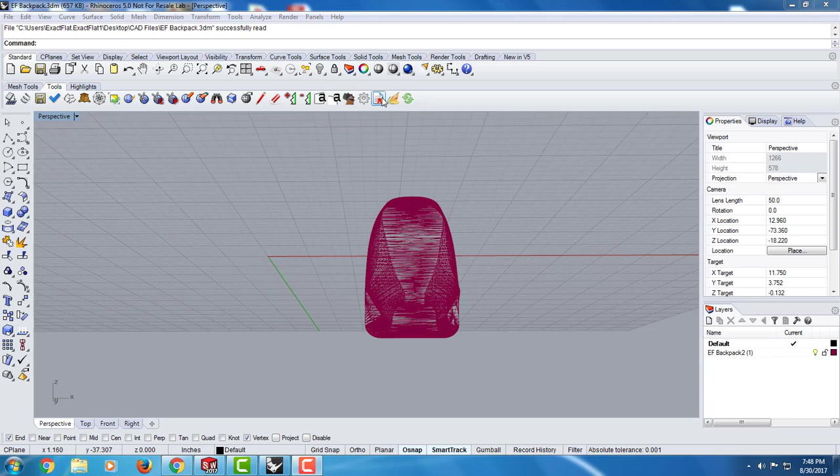This video will show a few of the tools in ExactFlat. In this case I have a backpack or a rucksack that was created, and we'll go through and show some of the tools.

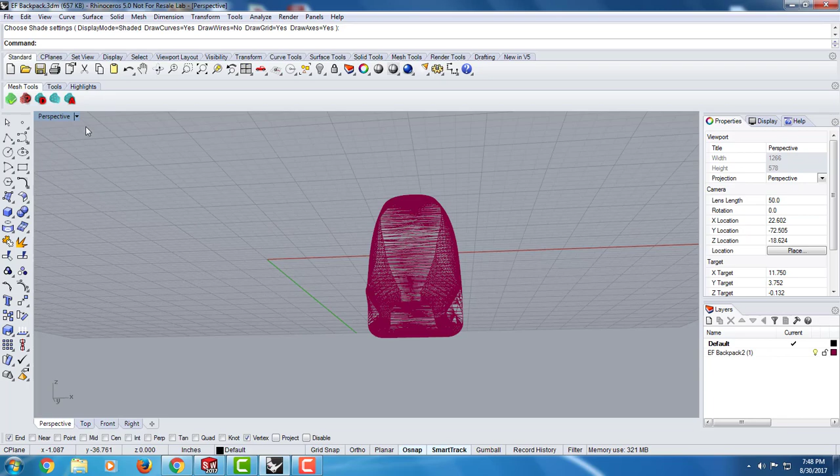The ExactFlat tools go from left to right, and we have meshing tools. If you have a laser scan or a file with odd looking meshing, we can remesh it. I'll show the meshing tool on some of these surfaces. We select adaptive remesh, select the part we want to remesh, and hit enter on our keyboard.

Once we do that, we have our adaptive remesh tools and sew tolerance, which basically explains how many vertices we want on each. Right now this vertex count is almost 5,000 vertices, and there are 5 meshes that make up this bag. That's what these numbers tell us.

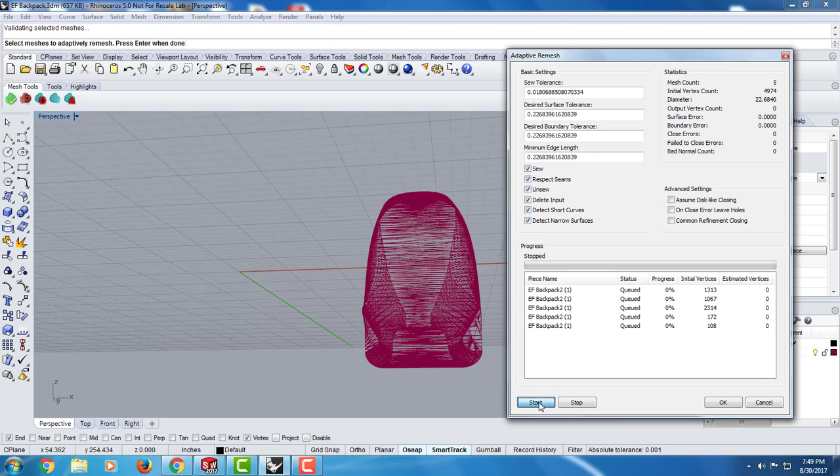I'll just say that's fine. Let's see what kind of result we'll get when we adaptively remesh. It's going to go through here, saying there's a high vertex count, but what it does, relatively quickly, I'll hit OK here, is create a mesh where the polygons are much more structured.

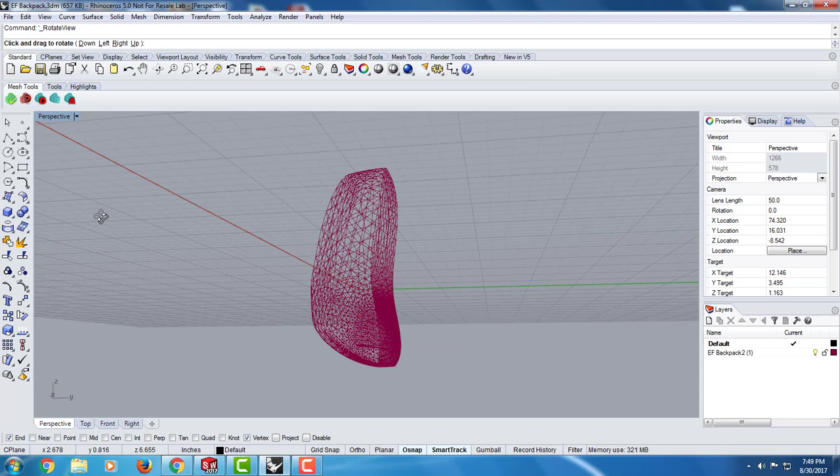So if I shade it, we'll be able to see it still retains the same shape. It's just that we've taken the polygons and spread them across the part equally, which helps in the flattening process.

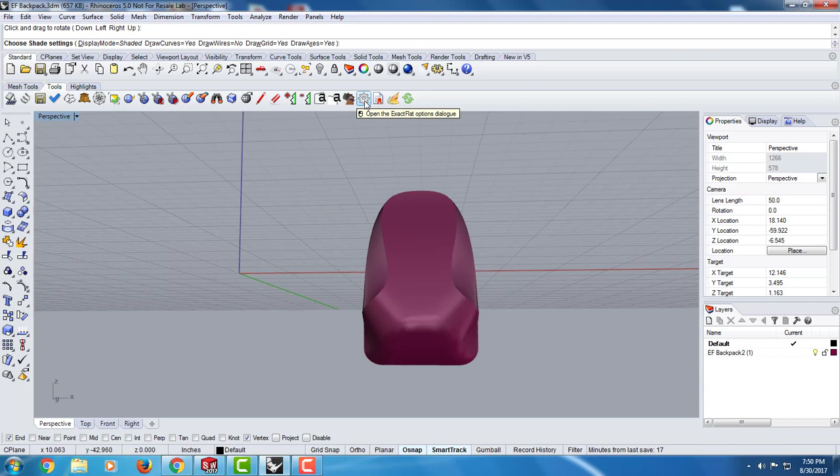One thing I'd like to show also is in our tools here, where you open up the ExactFlat dialog box, our sprocket, we can go into localization, and I can select English, Spanish, French, German, or Italian. I speak English, so I'll leave it on English, but it will localize to whatever language you'd like out of those 5.

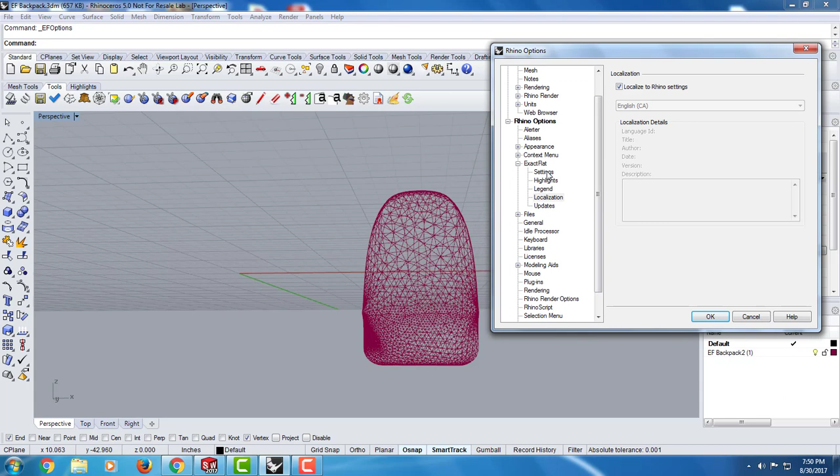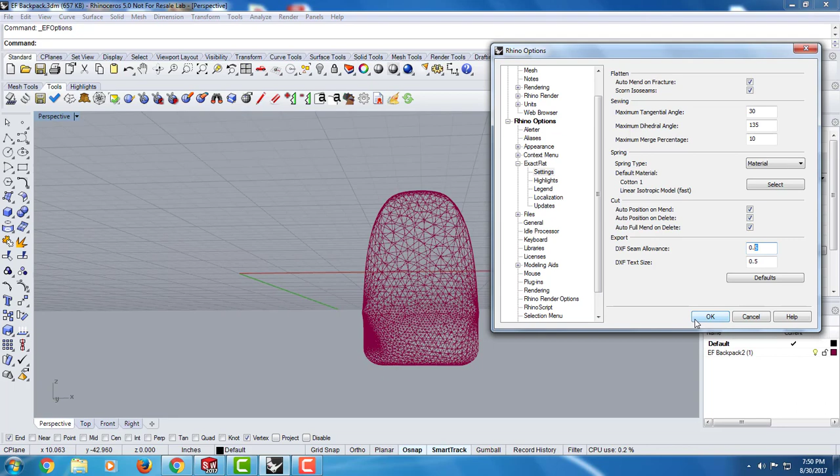Also in settings, this is basically where we create our seam allowance. In this case I have 1/2 inch, or 1/2 unit, giving our spring types, and these are all default settings. You can go in and say you don't want a 1/2 inch or 1/4 inch seam allowance, or adjust text size. I'll leave it at 1/2 inch so you can see what the seams look like. I'll just hit OK here.

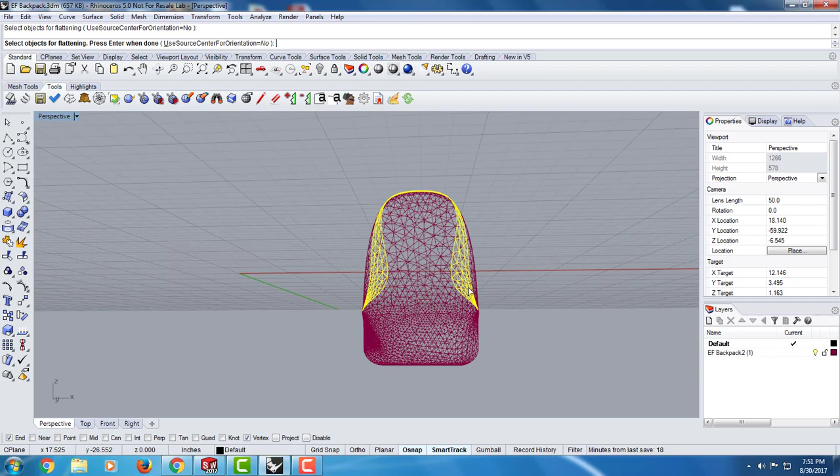So the next tool, after I've adaptively remeshed, moving from meshing tools into my regular tools, going left to right, the first button is select a piece for flattening. I can select surfaces I want flattened, or rectangle select everything and flatten everything. In this case I'll say flatten everything, hit that, and hit enter on my keyboard.

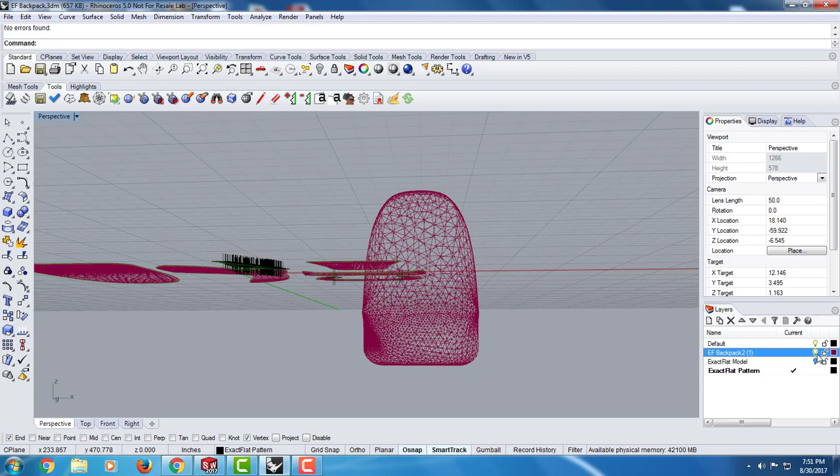Now I'll go into my layers. This is my layer state, and I'll double click to highlight the pattern, turning off the other layers since I don't need them. I'll go from perspective into a top view and bring all these pattern pieces into view. So we have our 5 pattern pieces, and right here these are what they call flip triangles, meaning the material is actually flipped over on itself.

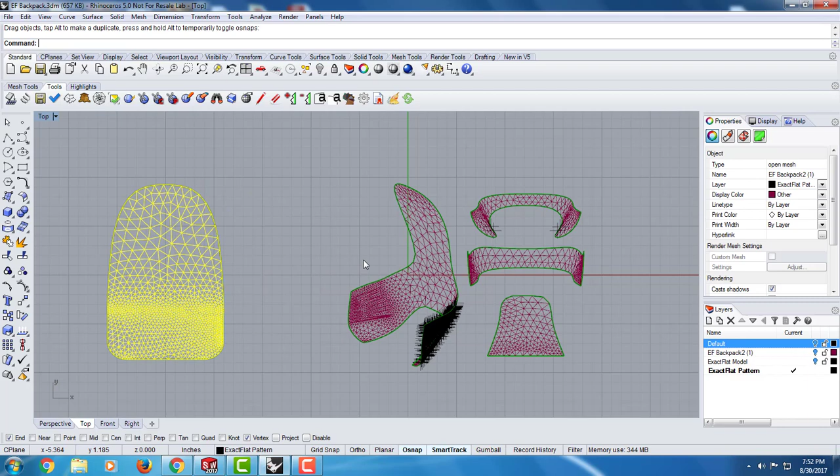So this is our initial 2D flat pattern. I'm just going to spread it out a little bit over here.

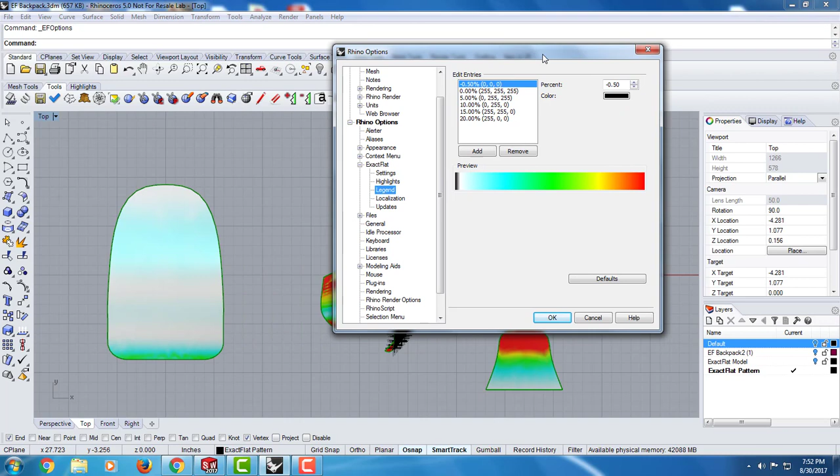If I go into strain analysis and shaded view, it'll show the strain on the parts. Going into options and the legend, it'll show the different stress factors. Red is above 20% strain or stress on the material. Yellow is 15%, 10% for green, 5% is cyan, and white is no stress.

ExactFlat for Rhino is a 2-step flattener. The first step gives us this flat, projected flat pattern, but it's not an optimized pattern. We still have work to do.

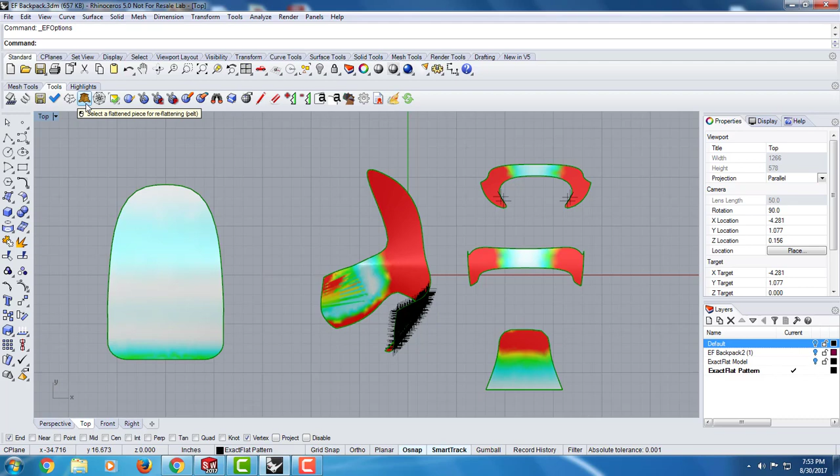So what we're going to do is use a function called pelt, this tool here, select the piece, and it's going to get rid of those flip triangles. I'll do it to this piece, and this piece, and this piece, and this piece. The pelt can get rid of those flip triangles when we have a bunch like I just showed you.

Just going to move these pieces around. We're still not at a flat pattern, and this looks kind of not good.

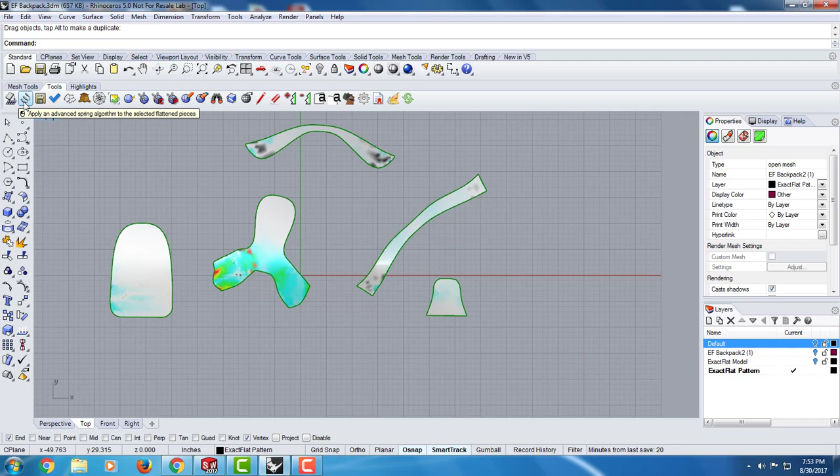So the next step I'm going to do is an optimize. I click this spring button, select the pieces 1, 2, 3, 4, 5, and hit enter on my keyboard. This brings up our spring settings, and this is where I can select a material, because a lot of people ask about whether we can select materials.

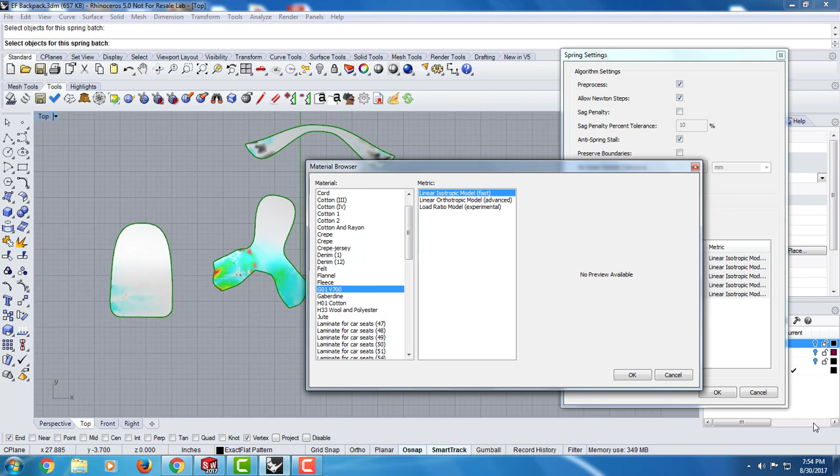So I can go into my material library and select a material. This one is a rubberized material used for making Zodiac boats. We also have cotton, different wools and denims, and quite a few other materials here. I'll use this rubberized Zodiac boat material, hit OK here, then OK here, and we'll start seeing these patterns change.

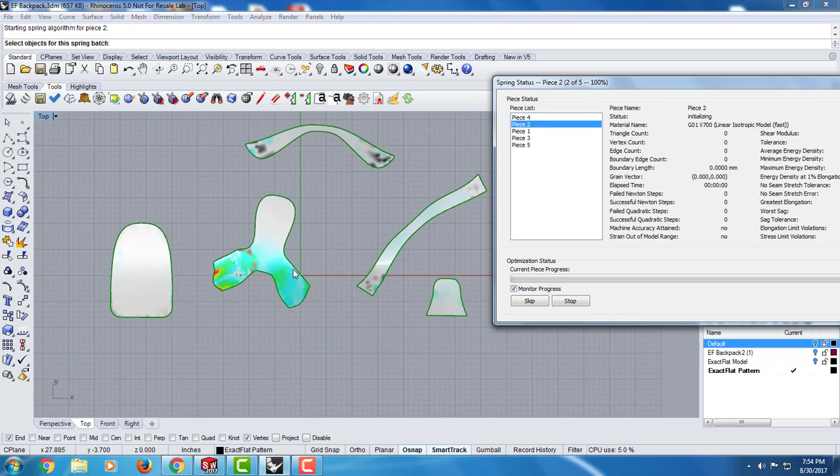I'll just click this here, which brings up this dialog box, and in a second you'll see these pieces start flattening. If you look closely, especially with this piece, you can see how it's changing. What ExactFlat does is basically try to get zero energy across that pattern piece based on the material we've selected, in this case a rubberized material.

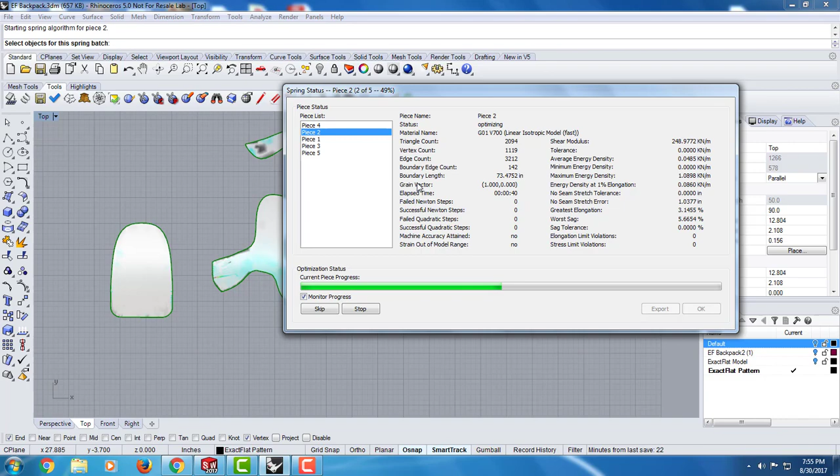So it's going through, and because I selected that material, it's going to take a little bit longer than if I had selected cotton, for instance. This gives us a status here, and we can export out a report that would give us all the different tolerances and information, should we be interested in that.

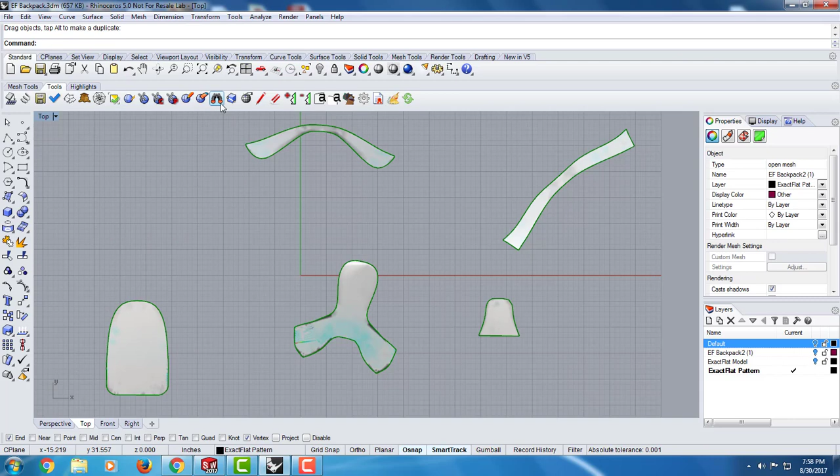Okay, so now that we have the pattern pieces fixed or flattened, I just hit OK, and here's our flattened pattern pieces. Some of the other tools that ExactFlat for Rhino has would be a find tool, which is this binocular here, and I can just place it over a piece and it'll align the pieces that go together.

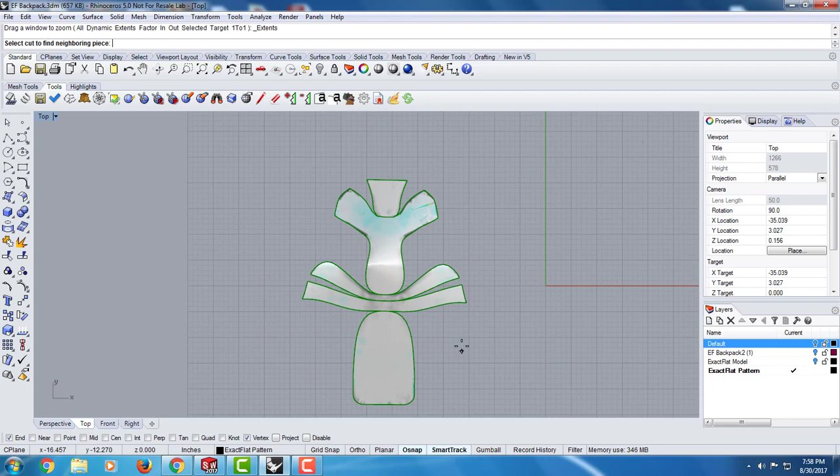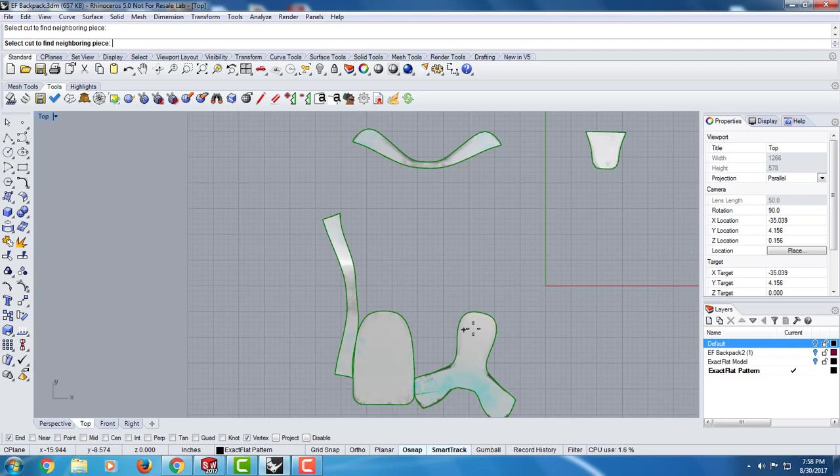And so that's basically walking the pattern. If I go over here, I'll show you a little bit better how the pattern can be walked. So I can just select an edge here, and you can see it'll find how the pattern goes.

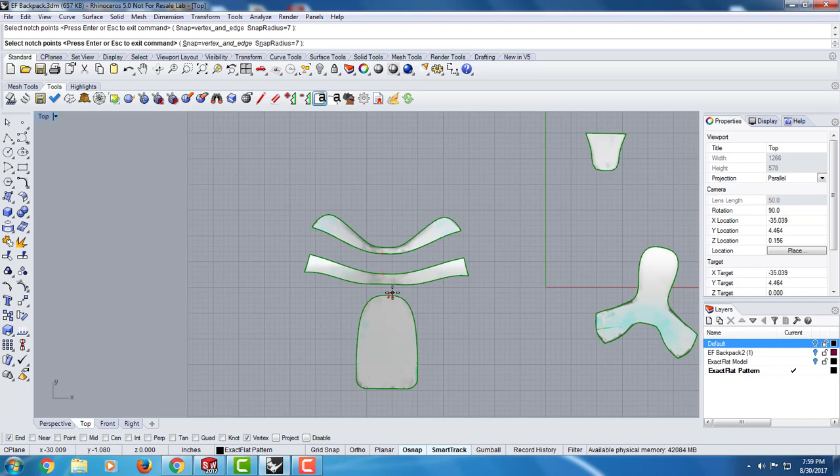Just put this back. Another tool in ExactFlat is a notching tool. In ExactFlat for Rhino, I can open the dialog box for notching and just add a notch here and a notch here. As you see, as I add notches, they automatically pair with the piece it gets notched to. So there's no more guessing where we have to sew pieces together - they're notched. And just close that.

We can also tag pieces. So I can add a notch tag, say here, and it shows up as a triangle or diamond shape, and just close that.

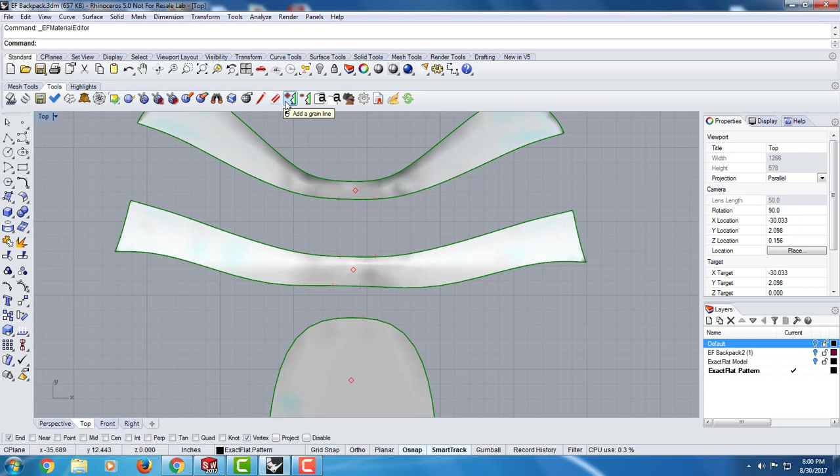The other tool we have, as I said, is a material editor, so we can change materials on the pattern pieces. We can add grain lines to a pattern piece. We can also trace a piece - so if we have something that we want traced from the 3D model, we can trace that using a trace tool in ExactFlat for Rhino.

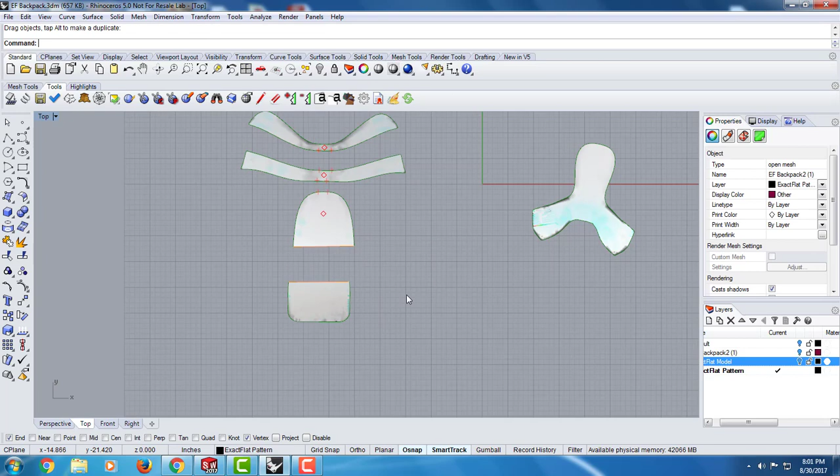Once we've done this, there are other tools here such as cutting tools. We have a plane cutter, so you can select an edge here and an edge here, and we can cut the mesh. Just select a piece here and a piece here, and select the mesh and cut it. So that's cut, and then we can rejoin it by selecting this and manually rejoining the piece.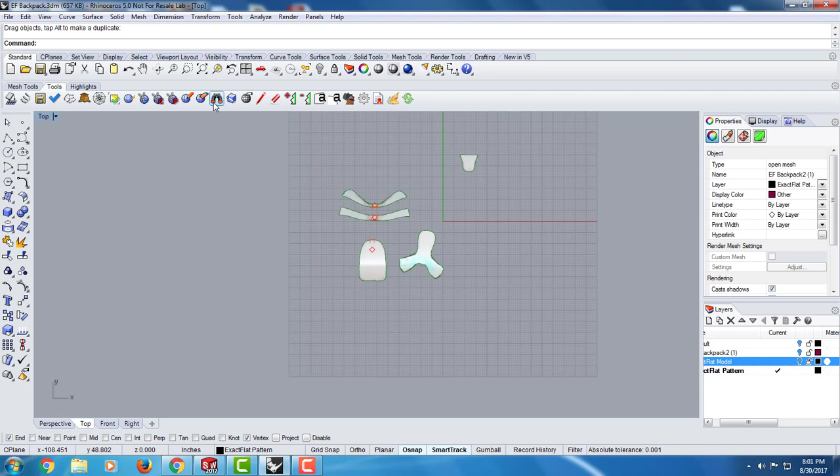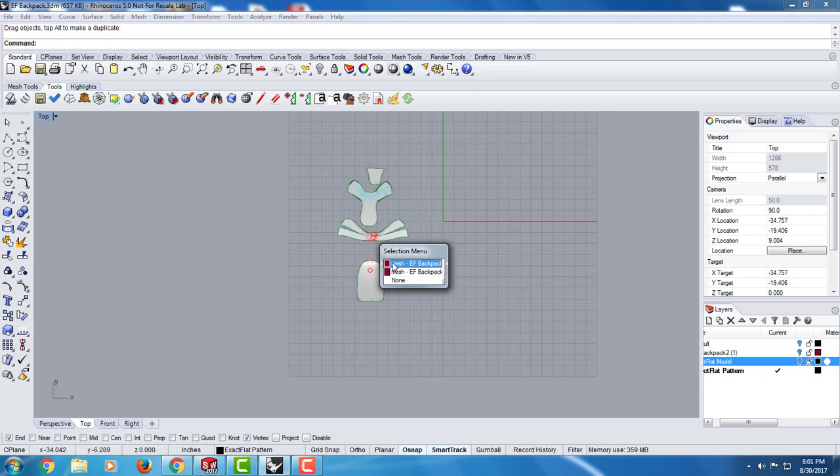Once that's done, we can export the piece out as a DXF. So I'm going to bring all these pieces in, use my find tool, and place all the pieces together again. And just move it out a little bit, because I'm going to add a half inch seam. What we would do is use our export tool here and export out the piece - I'll just call this a test, so it's a test DXF.

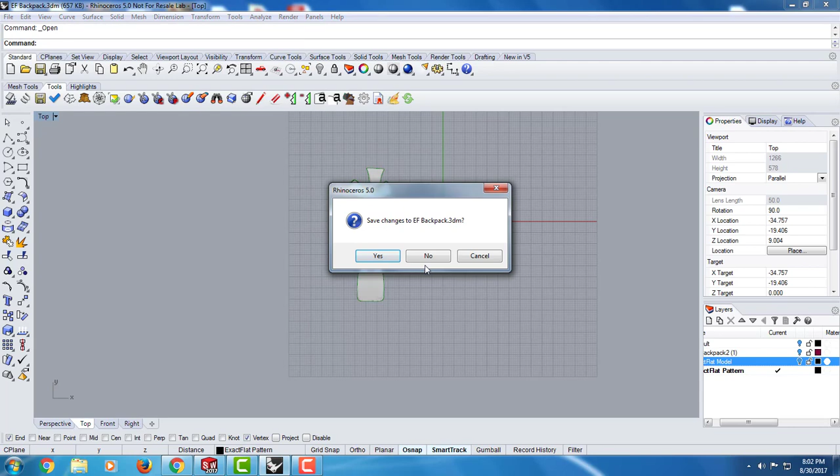If I go in to open the file and go into my desktop, we'll just find test DXF. This is in inches, so I just hit OK. Now let's go here to our view, and you can see it's added the notches.

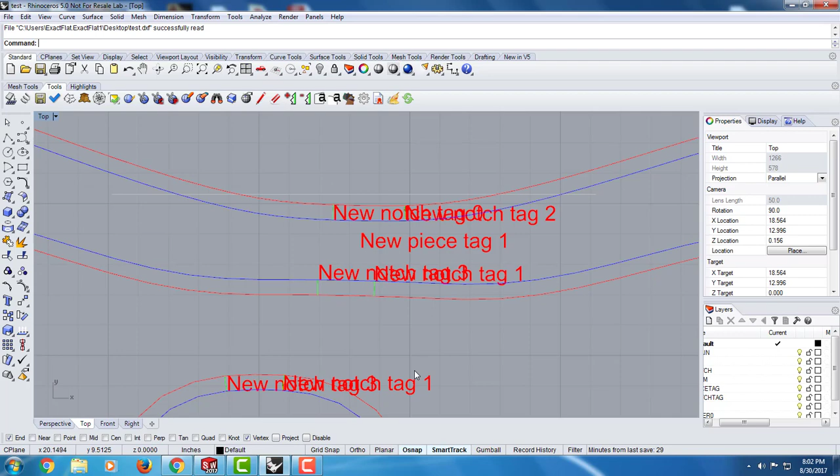I have actually created a naming convention, so it has the notch tags, and it has our perimeter piece and our seam. And if I go into my layers over here, I can see that we have a grain line, a cut line, a notch, a seam, a piece tag, and a notch tag.

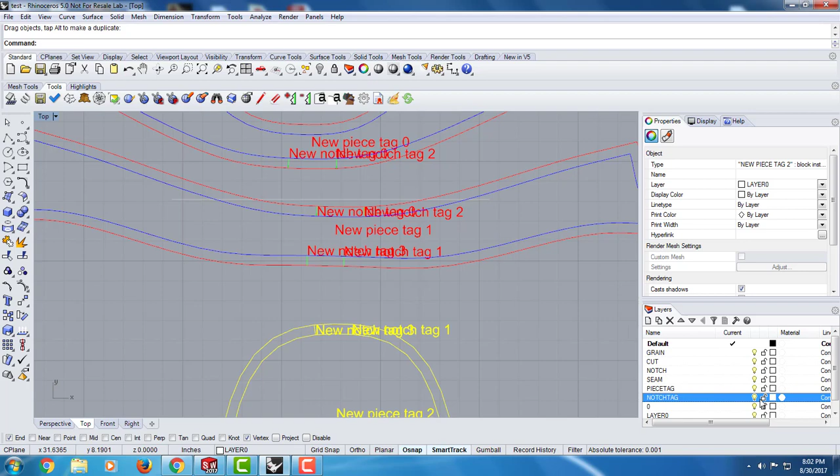So I can turn off these layers, and you can see - I just turned off the names - but you can go through and have a file that can be cut by a cutter quite easily.